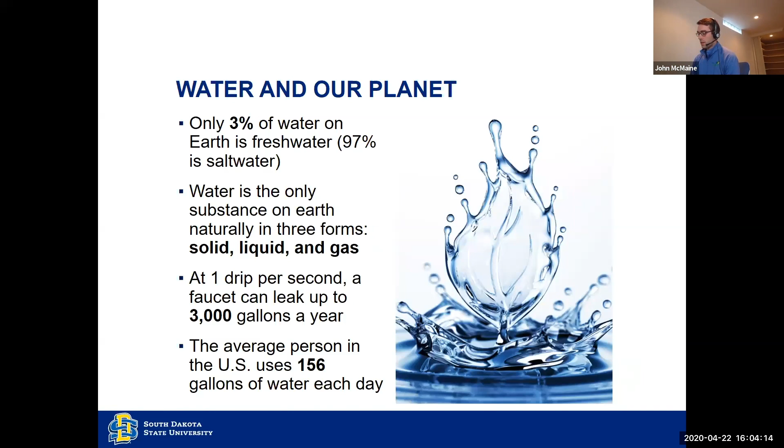And so water and our planet, only 3% of water on Earth is fresh water. And really, I mean, it's cliche to say, but water is life, but we don't value it as a resource as we should and could. And just a couple stats. So a leaky faucet, 1 drip per second, can leak up to 3,000 gallons a year. And then the average person in the US uses 156 gallons of water each day. So water is a resource that we don't always appreciate as we should, but hopefully today we can learn a little bit more about it and what we can do.

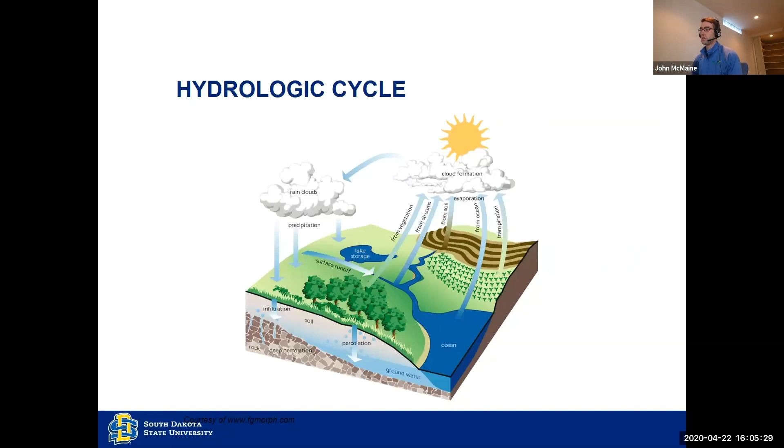So why harvest rainwater? We're going to break it down into 3 separate reasons, and really the impact that individuals can have for themselves, for their local community, and really for their region and many others downstream. So the first one is water conservation. When we think about water conservation, where we want to start is the water cycle. We probably learned it in 4th or 5th grade: you have rainfall, precipitation. In South Dakota, you have a lot of the precipitation in the form of snow. And then that either goes into the ground as infiltration, or it runs off the surface as runoff. And then some of that gets returned to the atmosphere through evaporation or transpiration, which is the term used whenever plants use the water and push it back up into the atmosphere.

So when we think about how urbanization can impact stormwater runoff, we start over here on the far left where it says 10%. So that's referring to runoff. In a natural system, you have about 10% runoff. So of the rain that falls, 10% runs off the surface. About 50% is infiltrated, either through shallow groundwater or through deeper groundwater flows, so aquifer recharge. Then about 40% returns to the atmosphere through evaporation or transpiration. And then as you move over to the second figure, you've cut down a tree, you've added a house, you've gone from 0% impervious surface, and an impervious surface is anything that water cannot penetrate.

So you've gone from 0 to 10 to 20%, and you've already doubled the amount of water that is runoff out of that water balance. Then when you move up to 35 to 50% impervious cover, so that's the graphic with the three houses and the one tree, well, now you've tripled. You've gone from 10% to 30% of the precipitation becomes runoff.

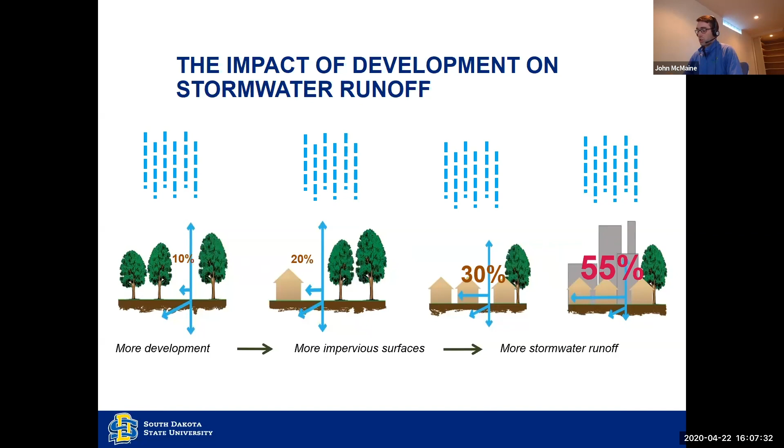And then when you're in a highly urban area, this could even be Brookings. It doesn't have to be a large metropolis like New York City. When you're at 75 to 100% impervious cover, then your runoff is 55% of your water balance. So you can imagine the impact that this has downstream. So you're increasing the amount of runoff, and you're decreasing the amount of time it takes to get to the stream.

And so when we think about that hydrologic cycle, the water cycle, most natural systems are what we term as infiltration driven. So the majority of precipitation is infiltration, with the second piece of that being evapotranspiration, or the combination of evaporation and transpiration.

Now, when you get into an urban hydrologic cycle, you're basically disconnecting the surface to the subsurface. And so, whereas before, water would infiltrate from the surface, go down into either shallow groundwater or deep groundwater, now that's disconnected. And what this does is it not only changes what happens on top of the ground, but most streams are fed by base flow. Base flow is the shallow groundwater that makes up the flow in streams for the majority of the year.

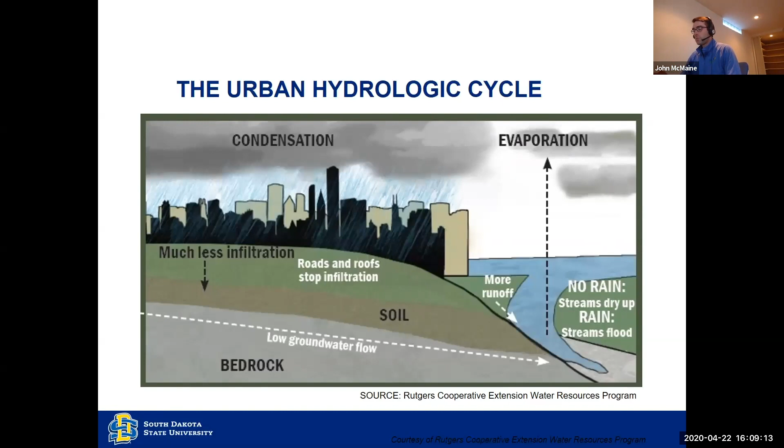And so streams go from being base flow driven to runoff driven. And so there's less consistency in flows. So you have less flow throughout the year. And whenever you do get rain, it's very flashy. So this leads to both less water in streams for the majority of the time, and then you also have more flooding and more erosion, more energy in the stream from high flows.

And so with that as our background, we're going to dive into these three separate reasons for using rain barrels. So the first is water conservation. Now, water conservation, again, goes back to valuing water as a resource. So yes, a rain barrel could save money on utility bills from a water conservation perspective, but you also think about the impact that has on infrastructure.

So if a city is growing and eventually they're going to need an increase in potable water resources, so more sources for water or more capacity to treat that water, well, reducing the treated water that's used helps essentially decrease the pressure on the whole system.

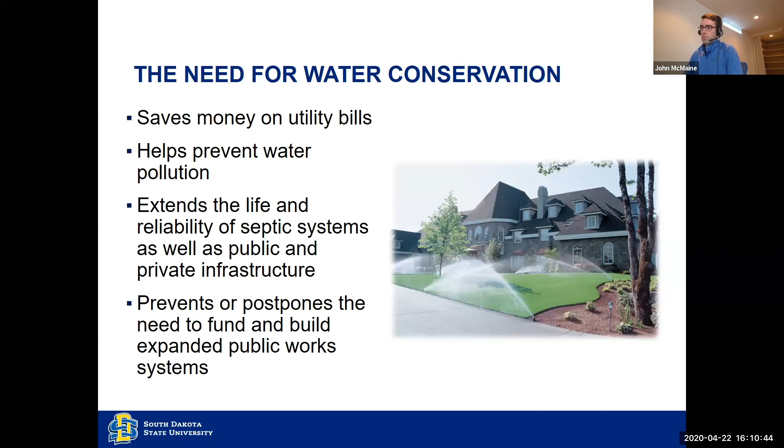And also because you have less water going into the stormwater systems, you also decrease the pressure on stormwater systems. So now if they're overburdened, well, now they have a little more capacity because you've held some of that in the landscape. So how much water can you harvest from one rooftop?

So if we just visualize a kind of average house, 800 square foot footprint, a 40 by 20 footprint. Well, a 1 inch rainfall event would generate 500 gallons of water. And 1 inch is definitely not unheard of. In fact, it's probably kind of in the middle to low end of rainfall events. And if you assume that you have 25 inches of rainfall per year, well, that's a whopping 12,500 gallons of water generated from that one rooftop.

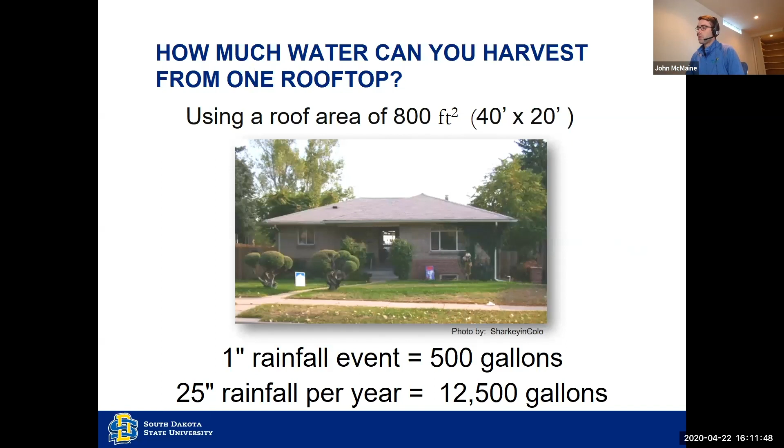Now, we're not able to capture and use all of that water because it's hard to use. We may not be able to necessarily use up everything in a rain barrel from the time that it falls to when we get the next storm, but we can use some portion of that. And so as an estimate, if you think about a 50-gallon barrel, you could save approximately 1,200 gallons from April through September if you empty it once per week. So if you have a use for that once per week, that's a kind of ballpark of what you can save.

And from a cost savings perspective, this may not be a big number, but you think about sustainability and conservation and Earth Day, and the water treatment process requires energy, requires inputs, and really for most of the uses for a rain barrel, you don't need highly treated water. And so you're taking pressure off a system that is maybe energy intensive, is maybe input intensive, and you're using water that really requires little to no energy, little to no inputs.

From a water conservation perspective, thinking about not wasting water that's been treated, it's important to consider other ways to conserve. For landscape and outdoor water conservation, adjust watering as conditions change, since plants require less water at certain times. Native plants can require less water and are more drought tolerant. Mulch around plants acts as a barrier for evaporation, keeping the ground covered and protected. Watering early in the morning also gives water the best opportunity to soak into the soil rather than being lost to evaporation.

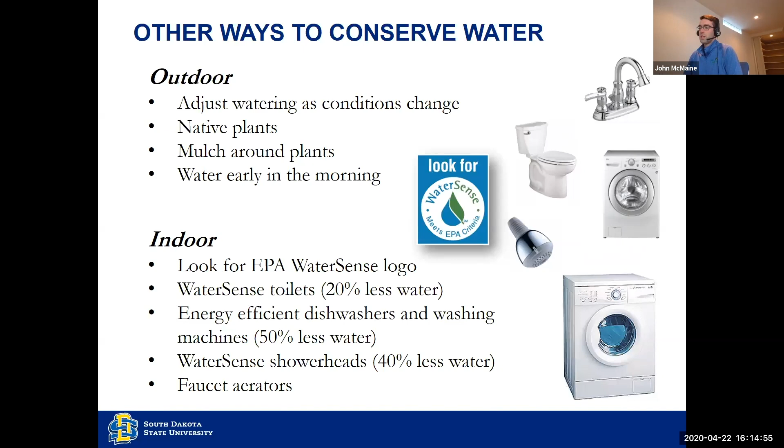Other things you can do to help, from a runoff perspective, include planting trees, installing porous pavers, and installing rain gardens. Jeremiah and I love talking about all these practices, so if you're interested, we can follow up after the presentation.

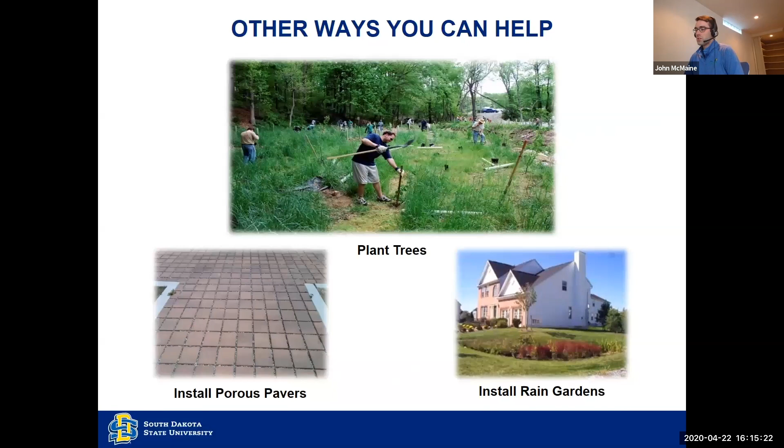The second big key point about installing a rain barrel is to capture rainwater runoff from a stormwater perspective. As we mentioned, when you have impervious surfaces—even just 10 to 20% of a watershed—you've doubled the amount of runoff generated from a storm event.

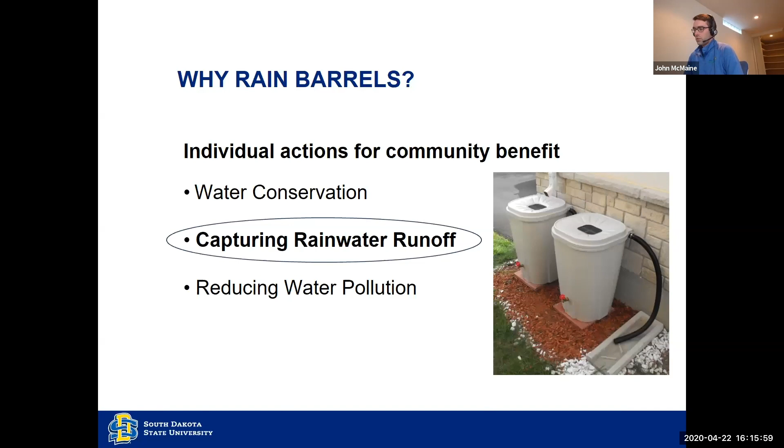This is exacerbated when you have higher annual precipitation or more intense precipitation events. Looking at our average annual precipitation map of South Dakota, the very dark green in the southeast corner of the state represents 24 to 26 inches. Up here where Brookings is, it's in the 22 to 24 inch range of annual precipitation.

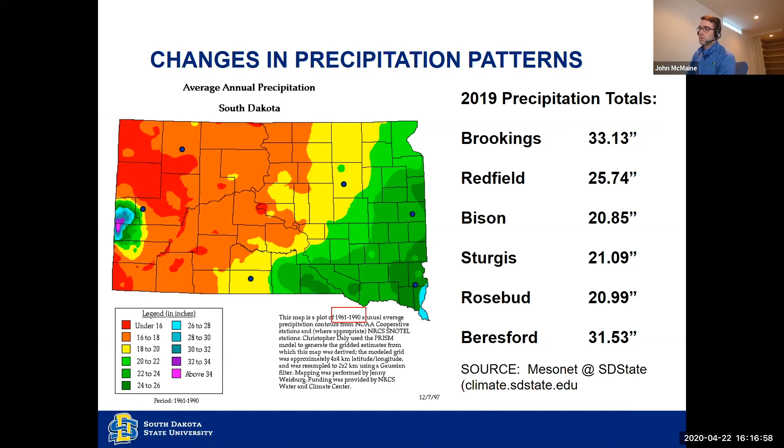Last year, Brookings got quite a bit more than that average — we all know it, we experienced it, we lived it. And this isn't just a pattern from last year; it's been a trend over the last 15 to 20 years.

This is a study that my colleagues Dr. Chris Hay and Dr. Dennis Todey did, comparing mean annual precipitation — the average rainfall and snowfall in a year. They compared the period from 1961 to 1990 with the period from 1991 to 2009. On this map, the light blue color represents an increase of 2 inches of annual precipitation, the darker blue is 3 inches, the very dark blue is 4 inches, and down in Iowa there's an area with a 5 inch increase.

When you think about a 2 to 5 inch increase — if you're from, say, New Orleans, that doesn't sound like much, but if our average is 22 to 24 inches, that's a significant increase. That's potentially taxing our infrastructure, so we're dealing with the potential for more flooding.

Since 1990, South Dakota has averaged 14% more 1-inch rain events. So we're getting more annual precipitation, it's becoming more intense, and more of it is coming in winter. Winter precipitation is projected to increase by 10 to 20%. If we remember our water balance — infiltration, runoff, and evapotranspiration — there's not a lot of evapotranspiration happening in winter, so the ability of our landscape to use that water is greatly decreased.

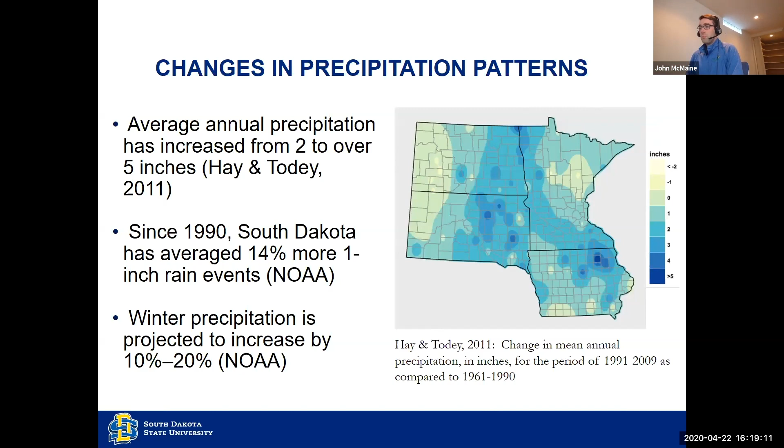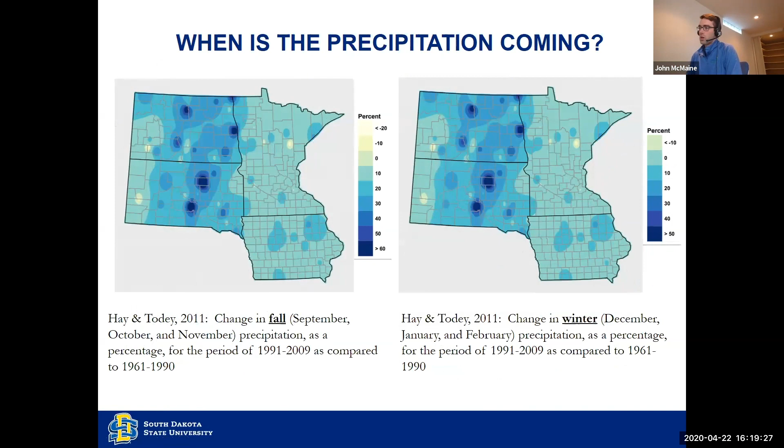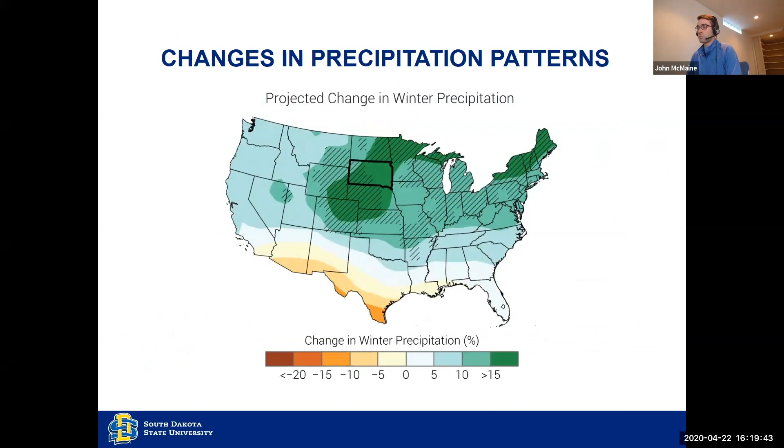So we need to manage water differently and think about how to do that. This is another example showing increases in fall and winter precipitation — times when there's no vegetation and very little use of that water by plants. This map shows the projected change in winter precipitation; where the last map was historical, this one is projected, continuing that same trend into the future.

Because we are experiencing more rainfall, we need to think about how we manage that runoff.

One big piece of this is something we think about: disconnecting impervious surfaces. If we look at this system, and this is typical, in a home setting we go from roof to gutter to downspout to a driveway or sidewalk or some type of impervious surface. From there it goes into a storm sewer, and then into a creek or lake or some receiving body of water. This does not give the landscape any ability to manage that stormwater.

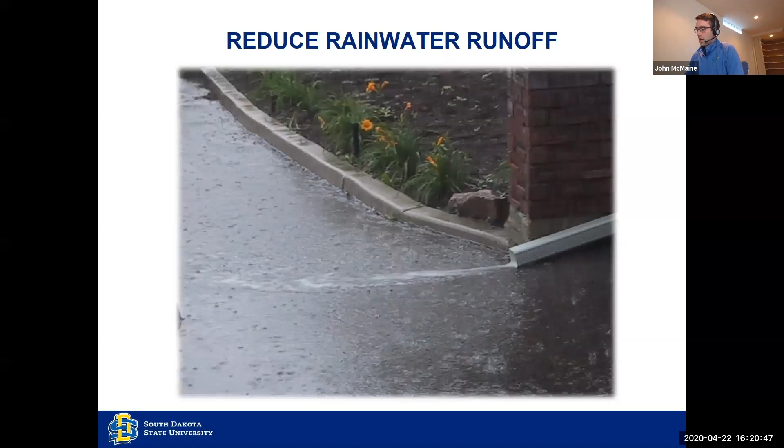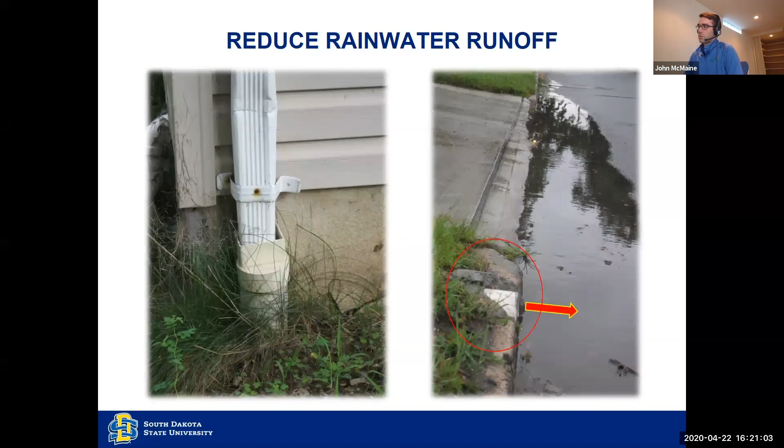This is an even more closely connected impervious surface. You have the downspout going directly into a gutter or into a pipe, which then goes into the curb and gutter system into the storm sewer. This is one step further—we don't even have a curb and gutter in this situation. It just goes directly into the storm sewer.

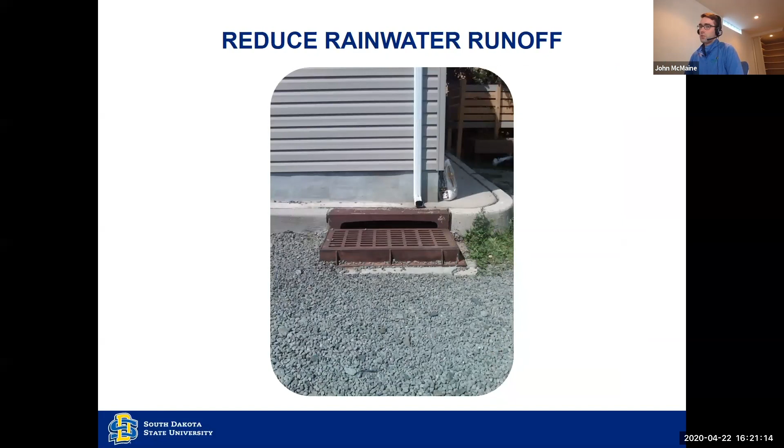So when we think about managing stormwater, we want to disconnect impervious surfaces. Let's hold that water in place. Let's give it a chance to be used in the landscape.

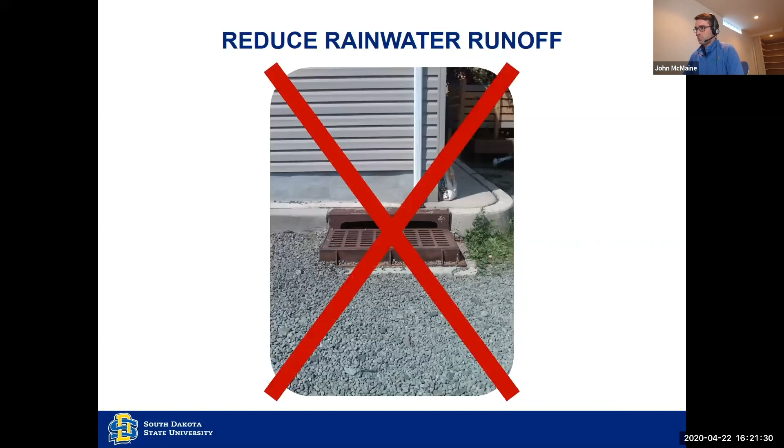One way we can do that is with rain barrels. Instead of having a direct connection from the gutter to the street, now you have the rainfall going into a rain barrel—water that can then be used on the landscape. So now the water that would have gone directly into the storm sewer is being used in the landscape. We're going from a runoff-dominated system, and we're trying to restore that pre-development hydrology, going back to an infiltration-driven system.

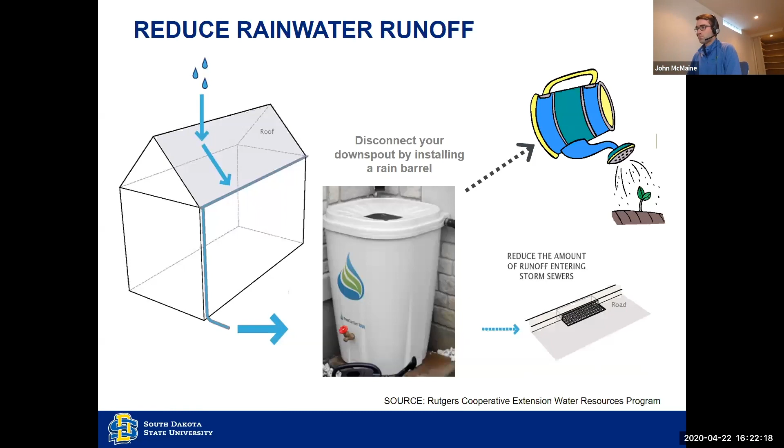Downspout disconnection is another way to do this. Again, this is disconnecting impervious surfaces. Whereas we had a roof to a gutter to a downspout to an impervious surface, now we're directing this onto the landscape, and we're giving the landscape an opportunity to use that water.

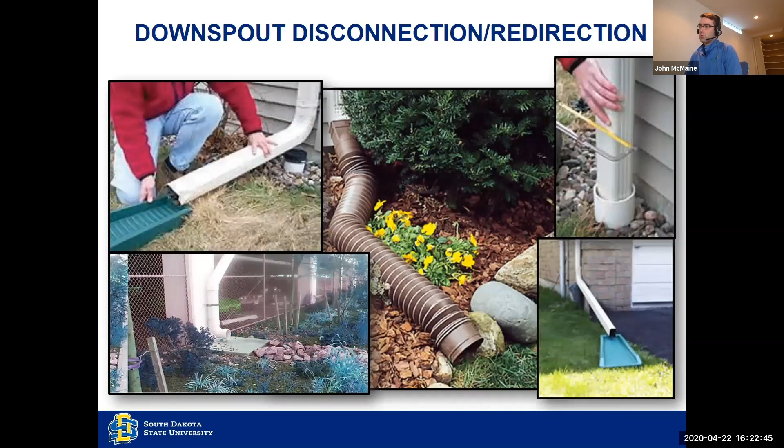There are other rainwater harvesting applications. Today we're discussing a rain barrel—Jeremiah will be getting into the details on that—but rainwater harvesting covers a range of systems.

I worked with a system in Kentucky, where I'm from. It was a Coca-Cola distribution facility. They had two 10,000 gallon tanks, and they used this water for washing floors, washing trucks, flushing toilets, and for landscaping. They had done a water audit to determine how much water they could use from rainfall, and then installed two 10,000 gallon tanks to use rainwater as a resource rather than just letting it go downstream.

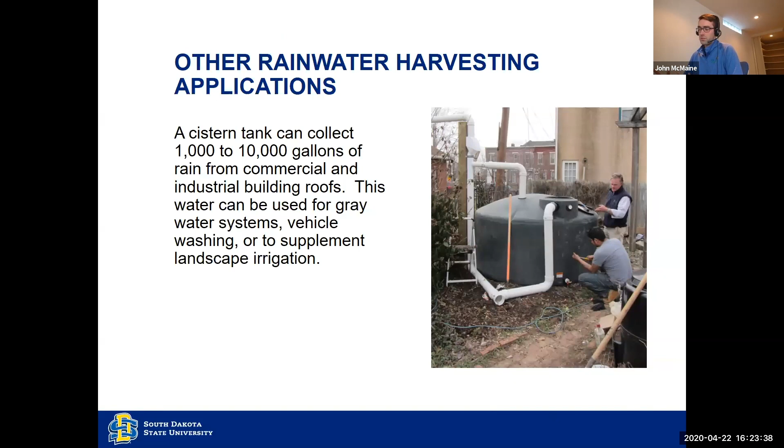Essentially what we're looking at is the ability to capture rain from rooftops in spring and summer when it's able to be used. If we think only about landscape and irrigation, that limits our ability in the shoulder seasons, say in the fall. But if we have other applications, then perhaps we can use that rainwater still in the shoulder seasons, in the spring and the fall.

Above ground tanks are most cost effective for existing sites because no excavation is required. Roofing material can definitely play a role in how clean the water is, but there are ways to improve the quality of the rainwater that's captured.

The tank should be emptied every 2 to 4 weeks to provide the most benefit, both from a stormwater management perspective, as well as making sure the water in the tank stays clean and doesn't allow for algae growth and buildup. It also gives you the ability to use that water on the landscape.

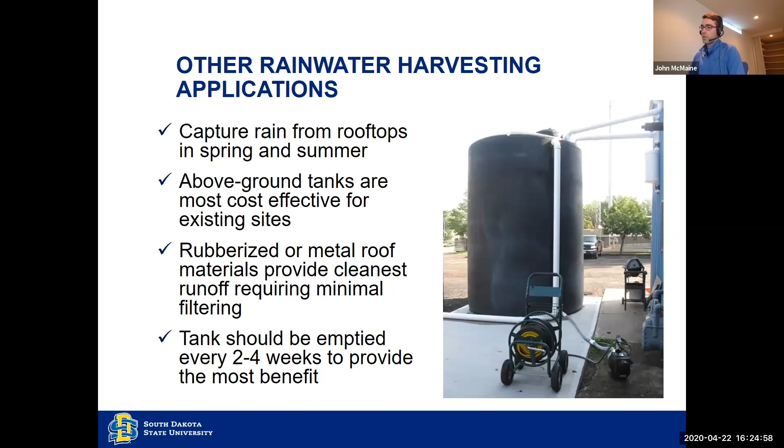Our goal is to distribute 100 rain barrels. If we can do 1,200 gallons per year on average with that, that's 120,000 gallons that we've saved per year. That's also 120,000 gallons that did not become runoff.

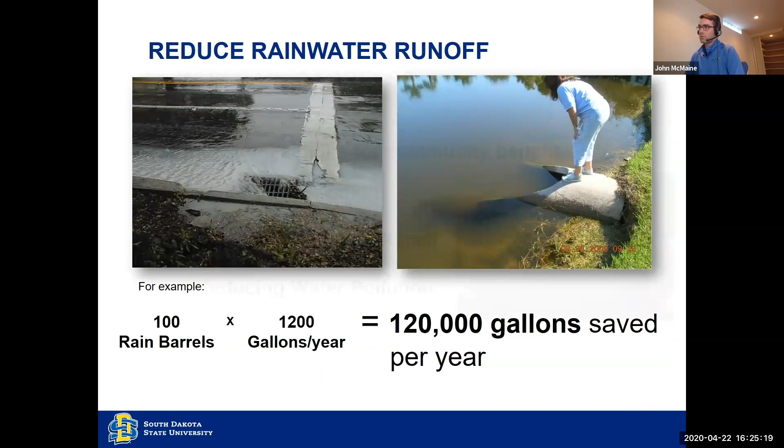This last point: a lot that we talk about with rainwater harvesting and rain barrels is related to water quantity, but there is a water quality perspective too. Non-point source pollution is defined as water pollution that comes from across the landscape, and that's what's associated with stormwater and runoff. We call it non-point source pollution because we can't trace it to a specific place it came out, like an industrial outfall or a wastewater treatment plant.

Non-point source pollution is challenging to manage because it is distributed. It's not that any single individual point is contributing a lot of pollution, but it's the cumulative effect of pollution from all across the landscape. Non-point source pollution can take many forms, and a lot of them are small, really very insignificant examples or sources of pollution, but cumulatively they have a very significant impact.

Non-point source pollution is one of the drivers impacting water quality, and it can impact a range of water quality benefits. So we think about a rain barrel - how does that reduce non-point source pollution? One way is by reducing the volume and peak flow, we're reducing erosion. Sediment is the number one cause for impairment of water in the US, so reducing erosion by reducing peak flow and volume goes a long way.

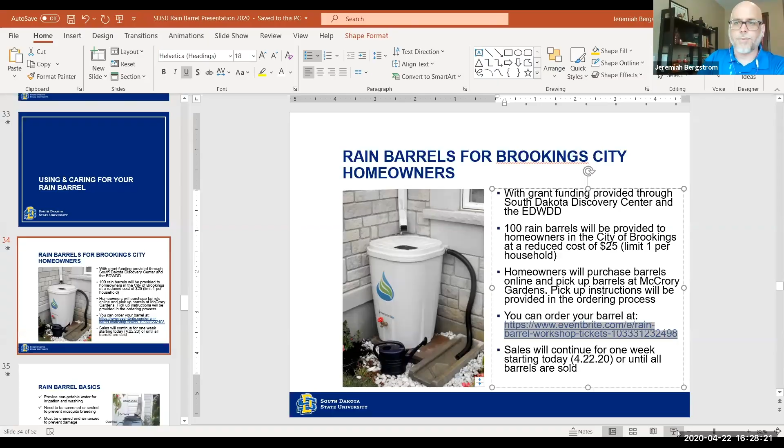I want to do the fun part here at the end - I get to tell everybody how they can get their rain barrel and hopefully get it installed, saving and using water. The grant we have funding from through South Dakota Discovery Center and the East Dakota Water Development District has allowed us to purchase 100 rain barrels that we will provide to homeowners and residents here in Brookings for a cost of about $25. We're limiting it to 1 rain barrel per household, and you will purchase the barrels online.

I want to send a special thank you out to Christina Lind at McCrory Gardens, who's handling this - she's actually babysitting our rain barrels right now. They've gotten delivered, they're sitting there, and we're trying to figure out how to allow everyone to get in there and pick them up. So we're working through that, and she set up the ordering you see here on Eventbrite. You can order your rain barrel, and after you place that order, we will provide pickup instructions. We'll hopefully have a time when you can stop by at McCrory Gardens during a certain window, and then we can get you your rain barrel and you can put it in your car.

Please keep in mind, you need to bring a vehicle that will actually carry the rain barrel home - it's 50 gallons, so it's a little bit large. It won't fit in a real small car typically, but will fit in the back seat of most large sedans, SUVs, vans, and trucks. Again, it is a 50-gallon container. The sales are open right now, that link is up, and we will continue the sales of the rain barrels for a week or until we've sold out of our 100 rain barrels.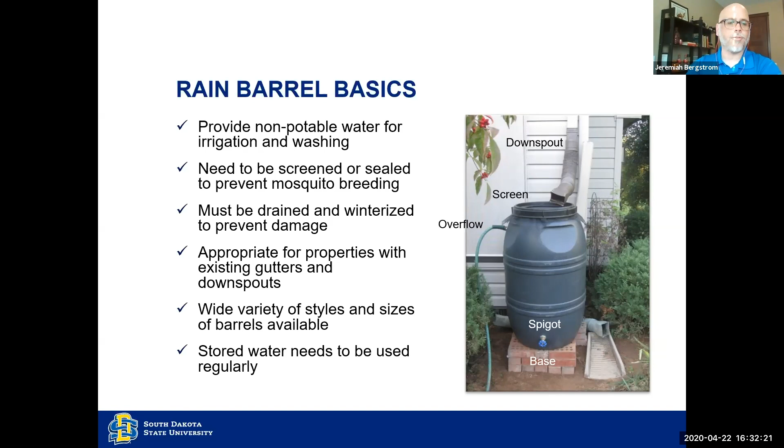Whenever you're doing rainwater harvesting, any project we pursue, we really want to know that you have a use for that water. Use that water regularly. Don't let it sit there. It's not providing any benefit to you, the landscape, or the stormwater system if that barrel isn't emptied out regularly so it can refill the next time it rains.

It's a great source of water. That water is not going to have any chemicals or salts in it, no chlorine. All those things we've had to do to make it potable for drinking, your plants are going to love it. Use that water as frequently as you can.

I like to hook up a soaker hose to my rain barrel, put it close to a landscaped area, and then open it up when it's full and let the soaker hose empty that rain barrel in about an hour. You'll get enough pressure from your rain barrel to push it to the end of a soaker hose, about 20 to 25 feet. Over an hour or so it'll drain right out, close it back up. Next time it rains, it fills. One of the great ways to use that.

Use it on vegetables in vegetable gardens. We encourage that if you're going to use it in a vegetable garden, use a soaker hose. Try to avoid putting the water directly on leaves or edible fruits. When you do harvest your vegetables, make sure you wash that produce thoroughly before eating, and use and empty that rain barrel frequently. Don't let that water sit there for a long period of time.

In addition to watering your gardens or landscaping, you can wash your dog, or use it for any kind of washing. We've done systems for washing vehicles, floor washing, things like that. I've had people say they've used it for toilet tanks when the electric went out and their well pump wasn't working, so they used the water from the rain barrel to fill their toilet tanks and flush their toilets. Bird baths or ponds in your landscape - you can put the water in those areas as well.

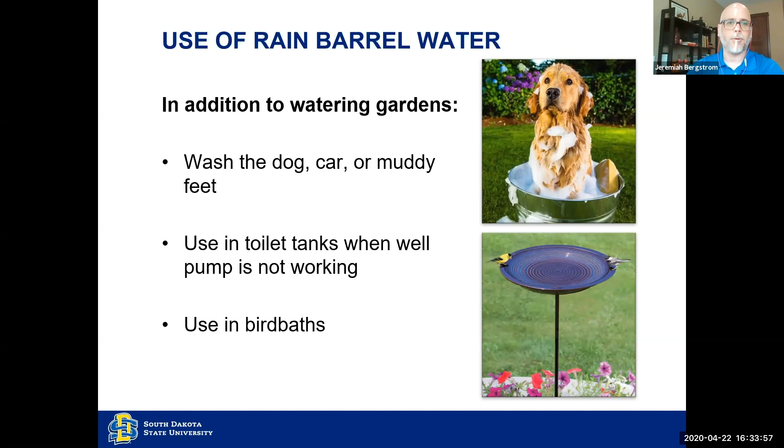Use that water frequently. Your barrel will be opaque, so you won't get a lot of light penetration. If you are looking at other barrels, try to find ones that are not translucent and don't let light penetrate, because if you get light in there with water, you'll get a lot of algae growth and plant growth in your barrel, which will clog it up, and it's also unattractive. Use that water to discourage algae growth. Make sure if you have a barrel other than the ones you're purchasing from us, that it's opaque so light does not penetrate.

Empty that barrel out. Even if you haven't used it to water your garden and don't need it right now, empty it if you know it's going to rain the next day. You'll get fresh water in it, and you'll also help alleviate the pressure on our storm sewer system here in the city of Brookings.

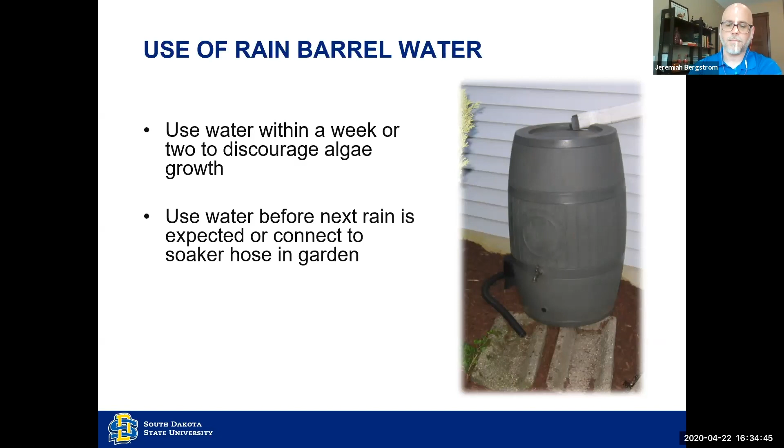Do not use this rain barrel water for cooking or drinking - this is not potable water for consumption. If for some reason you're putting any kind of chemical on your rooftop - I know some people have shaded roofs where they have a lot of moss growing and put chemicals on their roof for that reason - you don't want to connect your rain barrel to those downspouts and gutters and then use that water on your lawn or landscaping. That's not going to be healthy for it.

Again, mosquitoes - I want to come back to this. This is the top of the rain barrel you're going to get, it's going to look like that, with a screen in the center. You want to keep that screen clean and working, and at all times keep it on there so that you do not get mosquitoes in your rain barrel.

Keep it hooked up during the growing season, April through late September. Remove debris from the screen and keep an eye on it after rainstorms. Believe me, this barrel will fill up fast. Even a quick thunderstorm here in Brookings, lasting only 10 or 15 minutes, will fill that rain barrel. You'll be surprised how quickly it fills up.

Make sure you have your overflow directed away from your house and across the lawn or into your landscaping, so that the extra water doesn't cause any damage against your foundation.

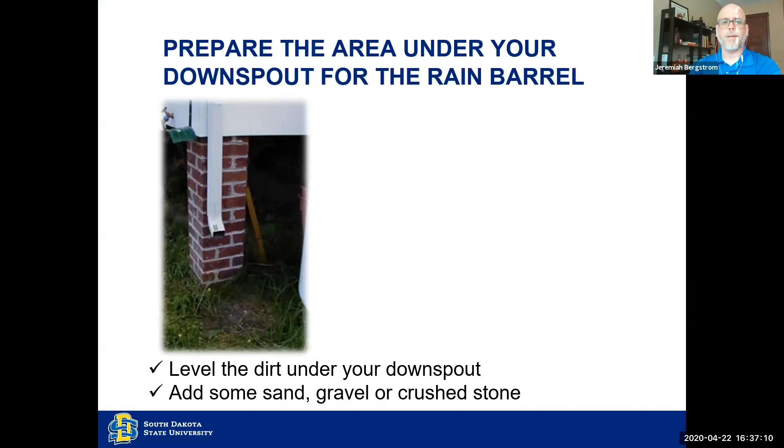Hopefully all of you are excited about getting your rain barrel home in the next week or two. I'm excited to hopefully see some pictures of it as well, but you need to do a little bit of planning and thinking up front, okay?

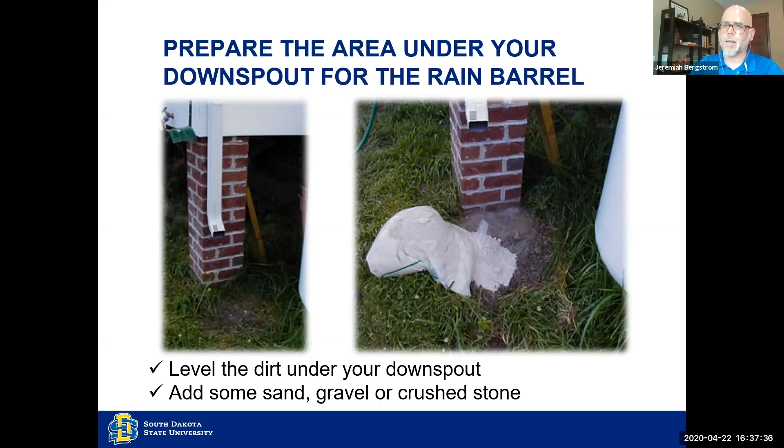You need to make sure you have a safe, level, secure place for your rain barrel to sit. Think about where it's going to go. I'd recommend removing the sod beneath the rain barrel and putting down sand, gravel, or crushed stone as a base, several inches of it, to provide solid footing. Make sure it's level and that you prepare the site appropriately.

You might also want to raise it up. You'll have a spigot on your barrel, but it'll be a little low to the ground, so raising it up lets you get a water bucket or watering can underneath. It also gives you a little more pressure. Keep in mind, this won't be pressurized — you can't put a hose and spray nozzle on it and expect water to come spraying out. This isn't water from your home's potable supply or a regular hose spigot. It's low flow; it will flow out the garden hose, but it won't pressurize through a spray nozzle.

You want a safe, level, secure base for your rain barrel, because water is heavy — over 8 pounds a gallon. So a 50-gallon rain barrel, when full, will weigh 400 pounds. You do not want that rain barrel falling over, hurting someone or a pet. You want it secure and stable, so plan accordingly and have a safe base before it fills up with 400 pounds of water.

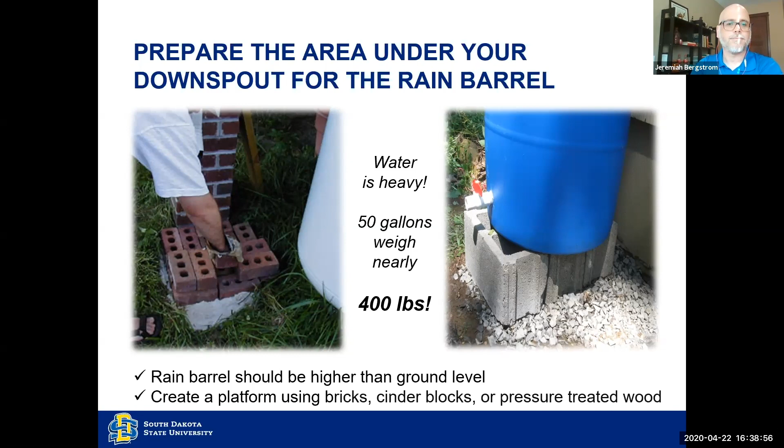Get your base in place, your foundation secure, put your rain barrel in and mock it up. Make sure you know where it's going to be and what height it will be at before you start cutting your downspouts. You'll need to cut your downspouts — the simplest way is to get your barrel in place, know its height, cut a section of the downspout out, and reconnect the elbow above so the water comes out above your rain barrel and discharges down into the screen, into the barrel.

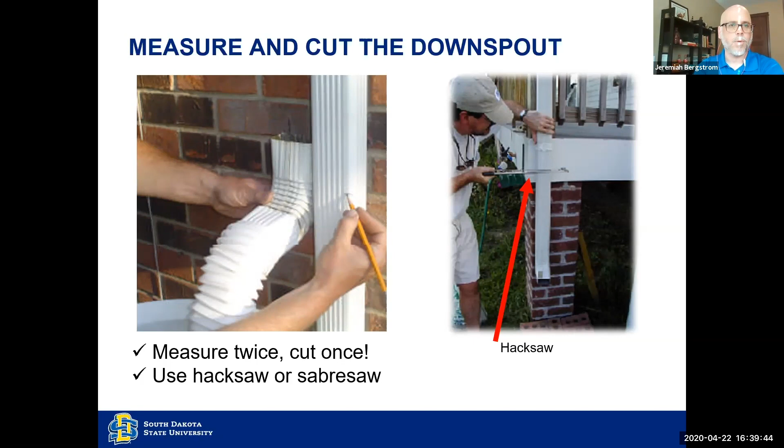You don't want to cut your downspout too short or too long and have to do it multiple times. So make sure you secure that and plan for that accordingly as you begin the process of your installation of your rain barrel.

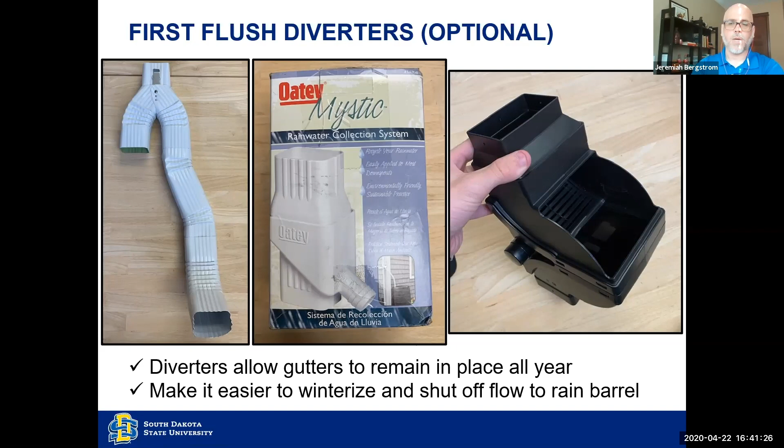Again, these make winterizing a lot easier, and also make shutting off easier if your rain barrel's full or you're going to be gone for a long period of time. You don't need the water, but you still want to leave your rain barrel up in the summertime. You can flip the switch or disconnect it.

Again, this is that last system, that Fiskars rainwater collection system. It's kind of an inline system. You'll cut out a section of your downspout, put this in, hook the hose up in the summertime to your rain barrel. It'll fill up. In the wintertime, you'll disconnect the hose, put a cap on here, and the water will just back up and go on down the downspout as it would normally. All right. Again, you're spending a little bit more up front, and it's taking a little time to put these in. It will make your system a little easier to maintain over many years in terms of winterizing it each and every fall, and then reconnecting it again in the spring.

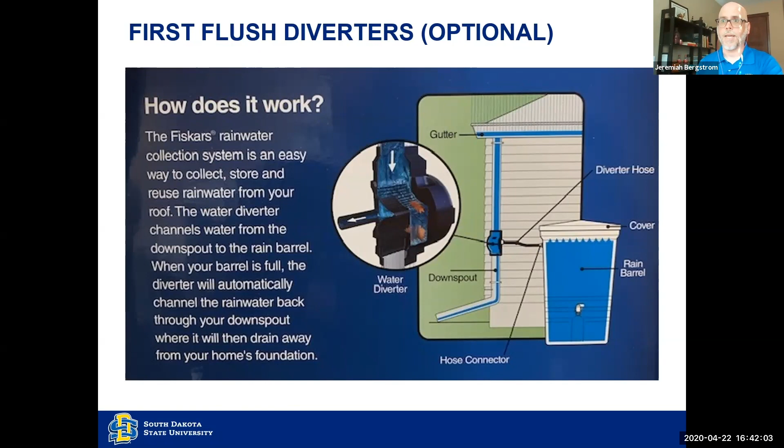All right. So again, you need to winterize your barrel. You leave the barrel in, put it in place in the spring, your downspout flowing into the barrel and your overflow coming out and away from the foundation. And then in the fall and winter, you'll reconnect your downspouts and or extenders to get the water away from there. Again, you'll make sure all the water's out of your barrel. Turn it upside down. I typically store mine upside down in a shed or in my garage. Clean it out really good and make sure that it's all ready to go to install for the next season.

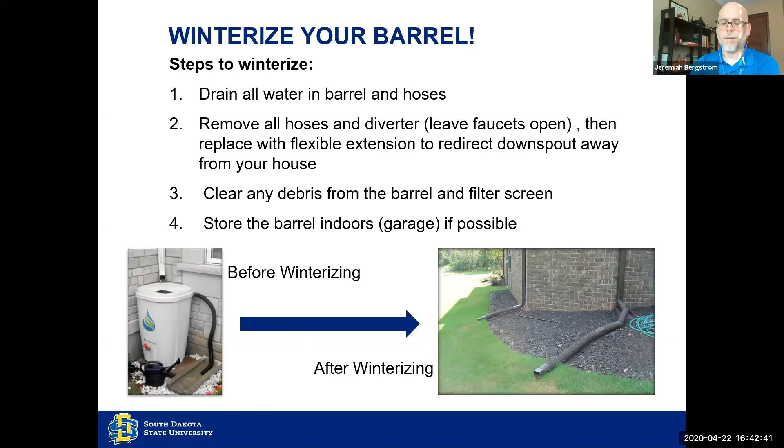All right. So this picture on the left is actually a picture of the rain barrels we have. Christina took a picture of this yesterday and posted it on Facebook. And so these are the barrels that we have for you at McCrory Gardens. You will get the whole barrel. It will not come assembled. It shouldn't be too difficult to assemble. There's a little bit of instructions.

You'll have a spigot like this that you'll have to screw into place. You'll have an overflow hose. And again, depending on where you install your barrel, the overflow hose can be hooked on either the left side or the right side of the barrel. It will come with a lid with a screen in it so that it is completely sealed and you do not have to worry about mosquitoes in there.

Again, we purchased these in bulk from EnviroWorld. If you look online, these barrels retail for about $80 or $90 each. Most rain barrels, if you're looking for rain barrels, are anywhere from $75 to $100, $150, depending on what you like and kind of different styles. So we're really excited to be able to provide these barrels to residents here in Brookings for only $25 with the support of our grant funders.

Again, the purchase is up and available on Eventbrite. I posted the link in the chat, so hopefully you're able to use that. If you're having any issues, let me know, and we can repost that. We've opened up the sales right now. I believe Christina has it up and running, so it is open, and we will start selling those rain barrels today, and we will let you know when you will be able to come and pick them up at McCrory Gardens, hopefully in the next couple of weeks, and get them installed. Again, we only have 100 at this time, so we will sell those and hopefully meet the demand.